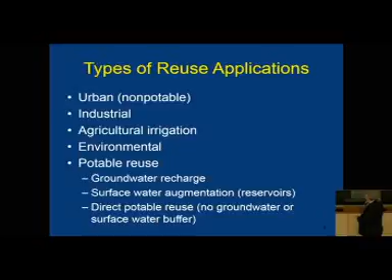Potable reuse through groundwater recharge, surface water augmentation, and eventually direct potable reuse, which is being proposed for two different projects. Urban applications throughout Southern California and other parts of California: irrigation, public spaces, outdoor landscape for residents. For example, Irvine Ranch does dual plumbing—they have outside reuse for landscape and inside potable fresh water for the houses. They also dual plumb some commercial and industrial buildings, as well as landscapes, golf courses, ornamental landscapes. For commercial buildings, there's toilet and urinal flushing, and dust control.

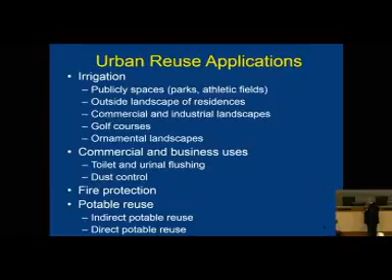One important thing about urinals and toilets: before I got here—I've been there 13 years—but back in the 1990s, the federal government put in a program to replace 2 million toilets in the LA area, and the Bureau was tasked to work with water districts in LA and other areas to exchange toilets for 1.6 gallon low flush models. There was a tremendous effort in the mid-90s, but there hasn't been an effort like that with the federal government since. It's also used for dust control, fire protection, and both indirect and direct potable reuse.

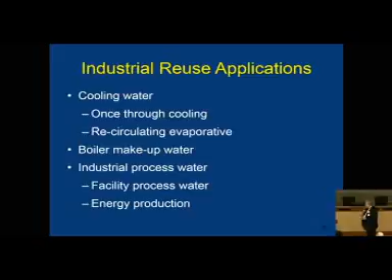Industrial uses are primarily cooling water—once-through cooling, recirculating, boiler makeup water, and industrial process water. We have one particular district, West Basin—if you get a chance to go to Southern California, visit their plant in El Segundo. They make 5 different types of water for 5 different types of industrial as well as landscape uses. It's also used for energy production.

These groundwater recharge projects are taking place right now. In the South Coast area, everybody, like in Orange County, has groundwater rights, but the problem with Orange County water is they have to help maintain the barrier so salt water doesn't come in from the ocean, as well as make sure through indirect use that the water is in the ground when people pump it.

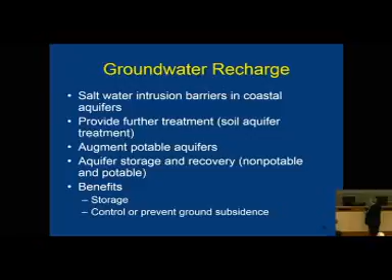Saltwater intrusion barriers are a big thing in Southern California, providing further treatment for soil and aquifer treatment, and augmenting potable aquifers. They're used for aquifer storage and recovery, with benefits of storage and control or prevention of groundwater subsidence. Then potable reuse is augmentation of groundwater and surface water with recycled water, using an environmental buffer, and direct potable reuse through advanced treatment.

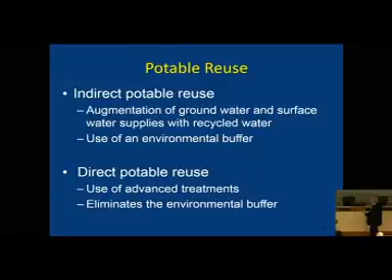We hope that eventually we'll be able to get it into the system, just like was mentioned during the first session. Now, I think you want to take it over here?

Okay, we have ocean desal on some of it down there. Of course, most of it's in pilots. The main plant that's coming online is the Poseidon plant at Carlsbad. That plant's going to produce, I believe, 50,000 acre feet. It's currently in construction, and I believe it's supposed to go online toward the end of 2016.

Open ocean intakes or subsurface intakes, we're trying to help. One of the things the Bureau of Reclamation was asked to do by the National Academy of Science and the federal government is to help spend our research toward keeping the cost of production down through membrane development, as well as review the environmental problems and try to minimize them through reuse, the intakes, and other opportunities like that. The big issue then is brine return to the ocean.

And then on the brackish side, we are involved in pretreatment and reverse osmosis. The biggest problem in the Inland Empire, which is where most of our brackish plants are at, is you've got a brine concentrate that you have to get rid of.

One of the districts is going to go to pelletizing the brine, which means they make a certain aggregate size of it and sell it to either asphalt or concrete processors, used as the aggregate to make concrete or asphalt. The only way you can do that is you have to have pretty close co-location. I believe the location of the plant they sell it to, plus they get money for it, is within a mile, because one of the big problems on brine concentrate management in the Inland Empire is if you have to carry it very far, you can't pay for the cost.

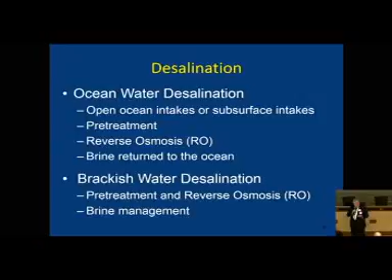Okay, and then the final one, let me just go over this, and I'm going to turn this over. We are doing a study with LA County on stormwater augmentation, and between work we had done previously about 5 to 10 years ago, plus what we're doing on a $2.5 million study with LA, 200 to 250,000 acre feet of water on an average year is potentially available from the runoffs on the Angeles Mountains. We're trying to work with them to help look at recharge areas for that water, and I just wanted to add that to this slide.

Thanks, Bill. I'm glad you did, because I threw this in this morning. It was a bit of a curveball.

One of the things we think about in working with agencies is that we want to encourage them to use a lot of their local supplies, and that's why we're talking about water reuse, desalination, brackish water desalination, taking advantage of impaired groundwater, for example, and stormwater is another big one. I know it's not specifically on the agenda, but there's a lot of technologies out there related to stormwater. If they do come up, I think that would be fine because I think this fits in with what we're thinking about in terms of the conversation.

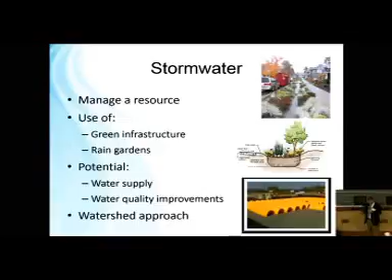Okay, so what I wanted to cover is just what our current technologies are. This is not meant to be comprehensive, just to give you a flavor of what we're working with now. I'm not necessarily an expert with all these things. I tend to work with them generally with agencies, but I want to run through them just so we're all on the same page.

So from a wastewater point of view, our current technologies are activated sludge and trickling filters, which is a biological treatment, very standard, you see them a lot. A technology that's coming down the pike that we're seeing more is membrane bioreactors, which involves the use of a membrane. The effluent from this tends to be a little higher quality, and it's very good for reuse. There's disinfection at all these facilities. Commonly it's chlorine, but we're seeing a lot more UV disinfection used. We don't create byproducts.

There's a little more flexibility in terms of using UV. So I put nitrification, denitrification up here. This is the ability to take nitrogen out of the wastewater. If you're using your water for irrigation of plants, you wouldn't necessarily want to do this, since you want to keep the nutrients in it, but there's some advantage to further advanced treatments if you do nitrify and denitrify the water.

Another area I threw in here because I think it's going to be a big part of our future is resource recovery. When you think of wastewater treatment plants, there are three things in the water that have potential value: the water, which we can reuse; the nutrients, particularly phosphorus, which we can pull out; and energy in terms of the organic matter. A lot of the wastewater research going on today is about turning these into more resource recovery rather than just a wastewater effluent discharge facility.

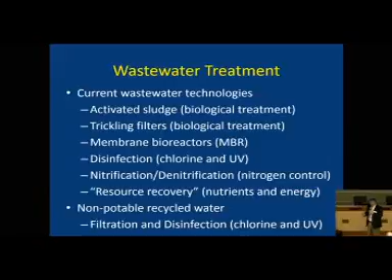So for non-potable uses, typically we have filtration and disinfection. That's very common for use in irrigation of agriculture and other non-potable uses.

There are some really innovative things coming down the pike on the wastewater side. One of my member agencies, the Orange County Sanitation District, has a research project looking at a technology called OpenCEL, which is meant to open up some of the microbiological cells that are there. The reason we want to do that is you can increase the biogas production, so you can get more energy out of it, making the process more efficient, and it reduces the biosolids, so the amount of organic matter they have to land apply later is reduced.

This stuff is exciting. We don't have a lot of these things in place yet. One question was, what can we learn from overseas? You have places like the Netherlands that may be more advanced on these types of things, and we can take advantage of that.

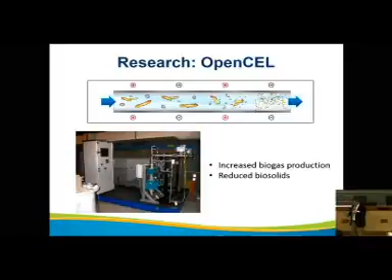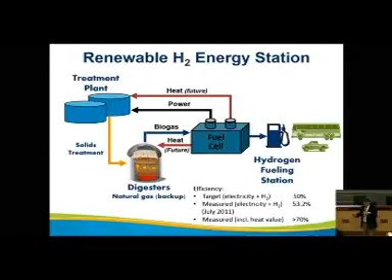I want to throw this up here too: Orange County Sanitation District has a hydrogen production project through a microbial fuel cell. They treat the water through this advanced technology to create hydrogen that can be used for gas and other uses. There's a lot of exciting stuff going on from a wastewater point of view.

Nutrient recovery is another one. There are a lot of technologies out there that separate the phosphorus and nitrogen so they can be used in the market.

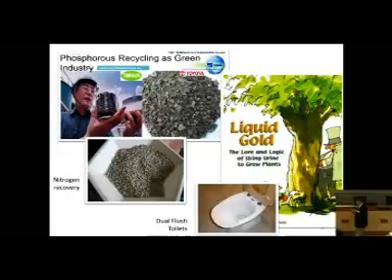On potable reuse, as Bill mentioned, with groundwater spreading you can typically use that water without any additional treatment. You take tertiary water and use the aquifer or the soil or the ground for treatment. This is natural filtration, and it's very well documented and very robust, so you get a lot of treatment just by the water percolating through the ground.

For projects that put water in a surface water reservoir, or if we want to inject the water directly into the aquifer, the state has termed this full advanced treatment, and it involves microfiltration, reverse osmosis, and advanced oxidation.

Oh, I forgot one thing - RO concentrate. So we run the RO on this water and we end up having this concentrate. Some people call it a brine, and typically a brine has a very high saline content - the salinity in this may be 6,000 parts per million. I use the term concentrate; some people use reject, but either way it has to be managed.

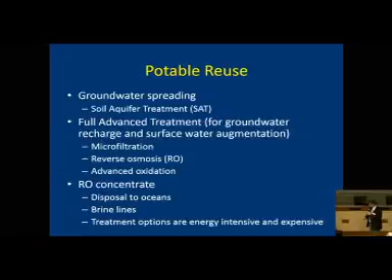If you're on the coast, you can discharge this to a wastewater outfall into the ocean - that's common practice, and you could argue the ocean is a bit of a salt sink. We also have brine lines that can take the RO concentrate to the ocean. But if you're in an inland area and need to treat that, those technologies tend to be very energy intensive and expensive, so that results in two things: trying to incorporate technologies other than reverse osmosis, and trying to come up with technologies that aren't as intensive, to get more water out of it and to treat it for discharge.

I'm going too fast - this is the full advanced treatment. I want to throw this up because a lot of communities and water districts looking at potable reuse are going towards what's probably the best term as the industry standard for how we're treating potable reuse. It's not the only treatment train that can be used, but it's the one we're seeing most commonly.

It involves taking secondary effluent from a wastewater treatment plant and running that through microfiltration, which removes particulates but also pathogens like protozoa.

That's also a pre-treatment for the reverse osmosis. That's the workhorse of the process. It can take out a lot of the trace organics that we hear about a lot, the compounds of emerging concern. It also takes out salinity. So it has a lot of benefits being able to RO water.

So not everything is addressed through RO. So the regulators have a process that they like to employ here called advanced oxidation. This breaks up some of the compounds that get through.

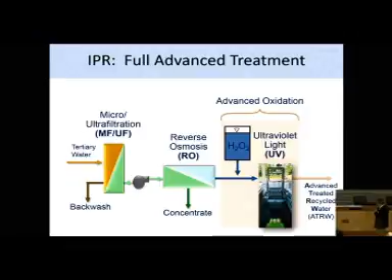After RO, okay, so I threw this up here just to give you an idea that there's almost a plethora of technology that can be used for treating water. And we can treat water to any quality we want. It's just a matter of money and energy.

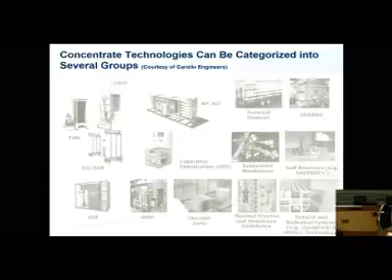So this slide was put together by a firm looking at what are the technologies for addressing concentrate that can be used for other purposes. The RO is osmotic membrane processes. We're seeing advances there, we're seeing hybrids of those. So there's still advances that we will have on this side of things.

It also involves forward osmosis, which will use a lot less energy than RO. It might be more useful on a concentrate at this point. It's not ready for municipal treatment though.

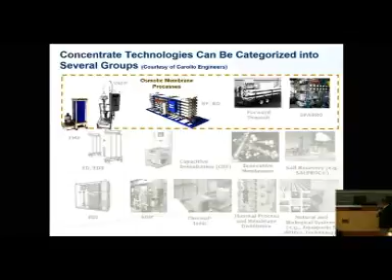And then there's others that are electrically driven processes. And then there's also other innovative ones that involve recovery of salts, innovative membranes, processes that I call hybrids that involve multiple different technologies. And then there are some biological systems. Aquaporin is one that's a protein that occurs in nature that you can use to filter water. So there's a lot of work going on there in terms of research.

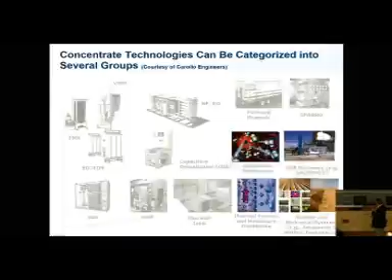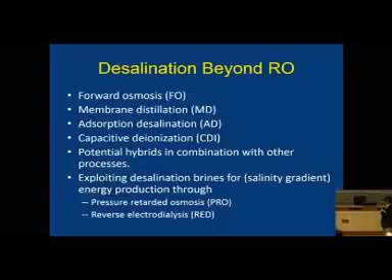One thing I want to mention is for desalination, there's also a lot of options that are currently being looked at. We talked about forward osmosis, but membrane distillation, which is a hybrid system between using membranes and distilling it - these hybrids are getting a lot of attention, and looking at the brines, using the brines in a way that you can produce energy. So there's a lot of innovation.